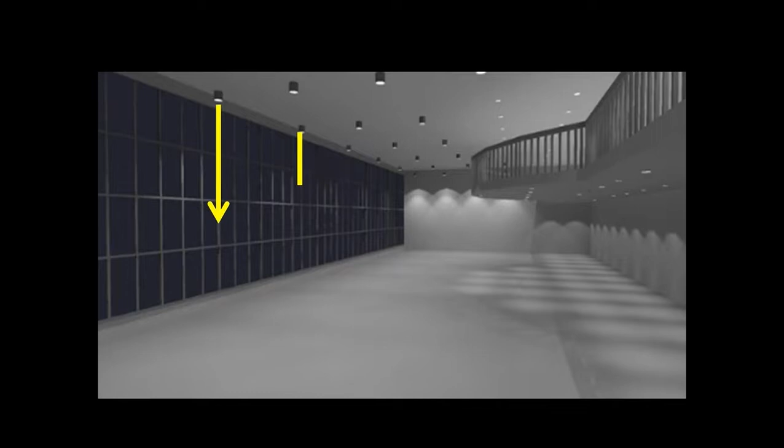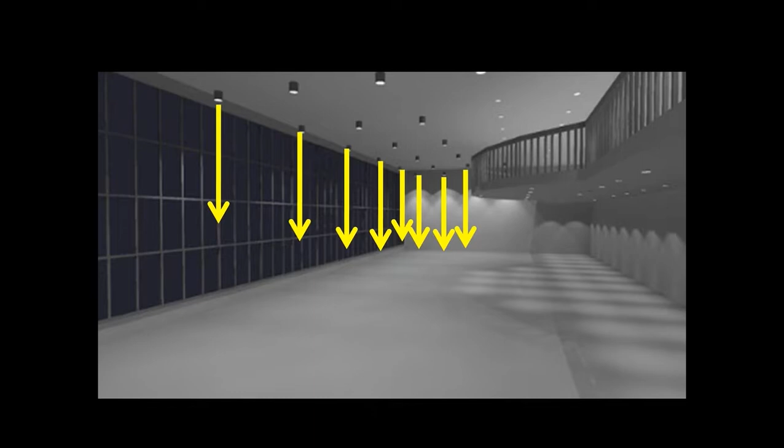Talking about the lighting design industry, and especially my profession as lighting designer, there is sometimes a misunderstanding about what is or what does lighting design mean. Sometimes we think lighting design is just choosing a luminaire in a catalog, finding a beautiful shape, finding something with a beautiful finishing, build a 3D model, put all the luminaires in a row, or build a scheme of the luminaires, and then calculate how much lighting we can obtain on the floor or on the surface. Sometimes our softwares offer a visualization in false color that is particularly useful, but it's not enough.

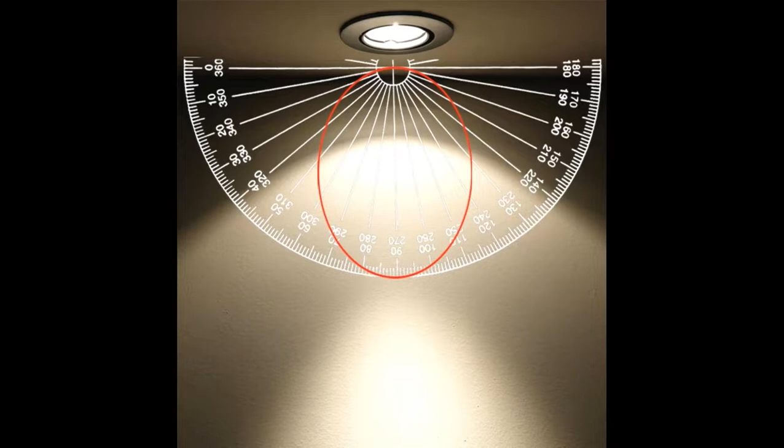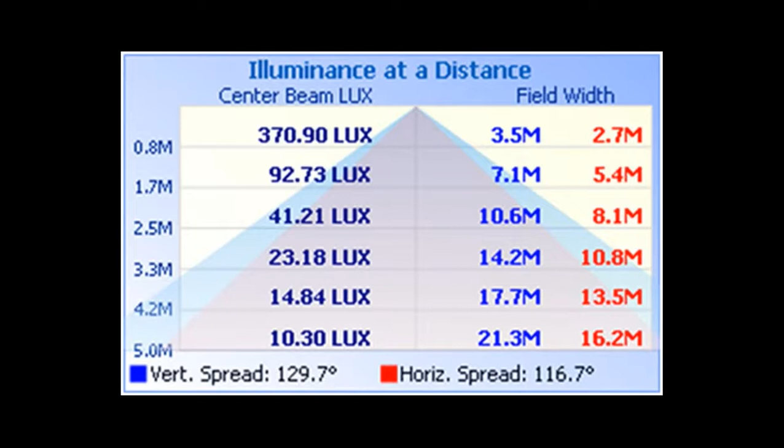The information we are able to find in the web catalogs or in a website sometimes is limited only to just the photometrics. So when we choose a luminaire, we have the possibility to understand what kind of beam opening we have and possibly some other details about the luminous intensity. And this allows us also to make some simple and rough calculation about how much light we can obtain on the task surface, just understanding and evaluating the distance from the luminaire to the surface.

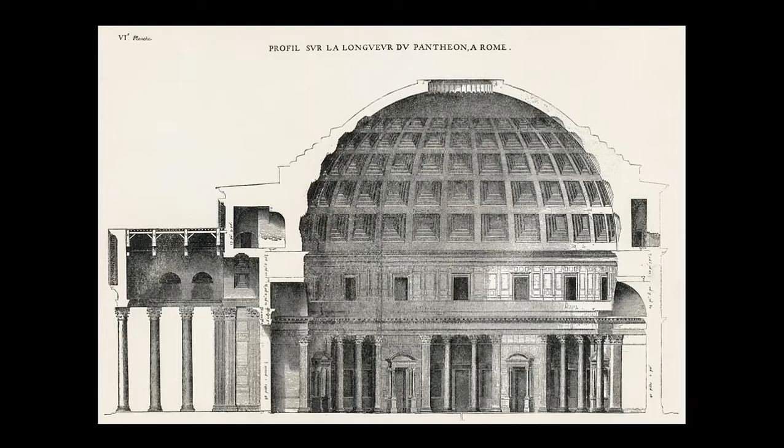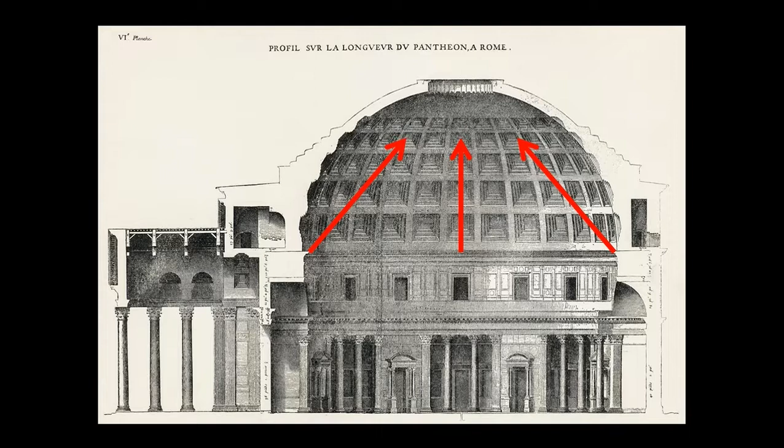It's very simple. But if this is very simple when we work in a new architectural project or in something that is built from new, what about if we have to work in another situation? Let's make an example. Let's suppose we are hired to design the lighting for the interior dome of the Pantheon in Rome. We can build a concept, we can find the positions for some particular luminaires, and we can have an idea about the luminaires.

If we choose a luminaire in a catalog, we can obtain some data that are absolutely interesting for understanding the power consumption, the luminous efficiency, of course the optics, the adjustability, the dimension, also the weight. And then we have some data that are, let me say, not so much meaningful for us. For example, the color temperature and the CRI, but the numbers themselves are not meaningful for us as lighting designers. And also the photometric file that we are able to download from the manufacturer website is not enough any longer, because we have just a quantity of light. We have just the information about quantities, not

quality. For a project like the Pantheon, first of all, we have to consider that it's very difficult to build a 3D model that can simulate also the materials and the ancient surfaces that are part of the building, also the colors, also the finishing of the colors are very difficult to simulate in a 3D model. And so also the calculations are very difficult and cannot be precise. So, what do lighting designers need from their side?

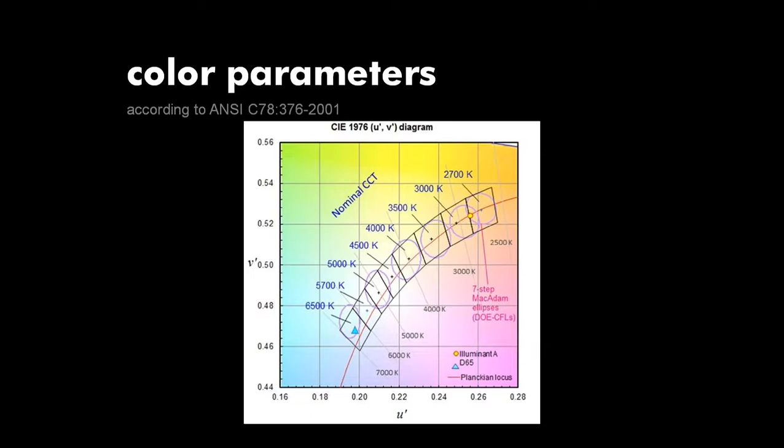Then, most of the manufacturers state in their catalog their luminaires are just 2 or 3 step MacAdam ellipses, and the ellipses are sometimes very rough. This is not useful for us. I want to see a diagram with the nominal color temperature, correlated color temperature. I want to see exactly where the MacAdam ellipses are found, and especially in the part of the black body.

I want also to know the radiant flux emitted per wavelength, because in some particular projects, for example, wineries or food shops or art galleries, etc., some wavelengths can be very dangerous or can create damages on pigments, flavors, and other peculiarities that are typical for these products. To my knowledge, there are no manufacturers at this time that are sharing this kind of information.

But let's think we are choosing an RGB product. So, what is the emission for single channel? I want to see exactly the emission, because if I try to create a colored light, I want to see how I can mix the RGB emission and create that particular color. That sometimes is very difficult.

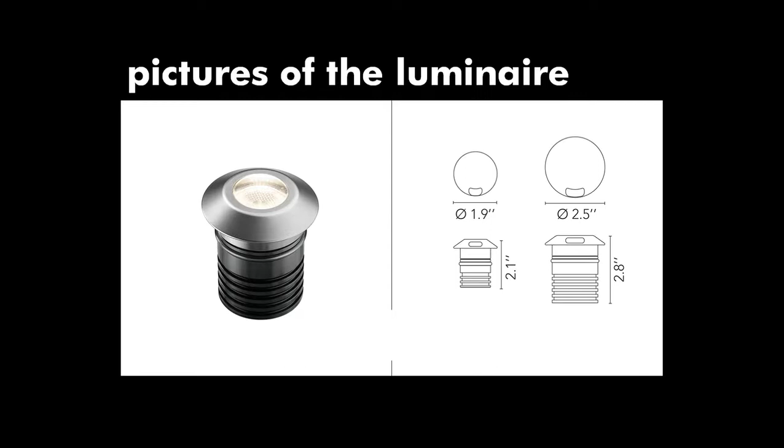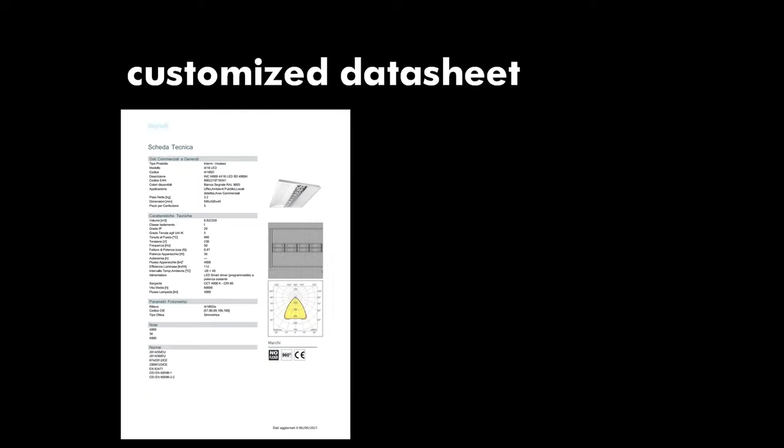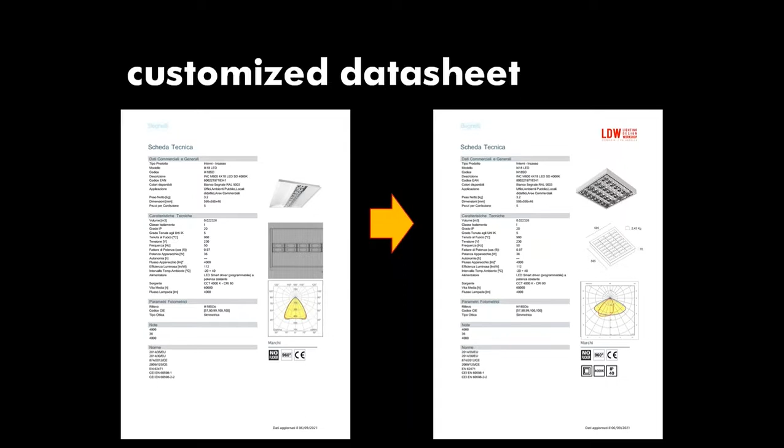And of course, I want to obtain the significant pictures of the luminaire, not just the finishing, but also the dimension, to understand if it's possible to put the luminaire in the position I considered. And I want to customize my data sheet in a way that is not just automatic because it was created by the manufacturer. And this does not mean that I have to put my own logo on this paper. I want also to build my data sheet in a way I can choose exactly which information I would like to share with the contractor, with the installer, with the architect, etc.

So I have 3 questions for the manufacturers. May I find all the data I need included in a unique file, so I don't have to waste time looking for the data I need in different sources? A unique file doesn't mean the photometric data, so an IES or Eulumdat file is not enough.

Another problem: may I automatically verify if the data I need are updated, so I don't have to waste time calling the manufacturer, the sales agency, the representative, and ask if the data I found in a catalog that was printed 6, 8, 12 months ago are the same data that are currently offered to the market by the manufacturer?

And the last question, I would like to save my data in my open and customizable database, because I don't want to be forced to use a particular software or another kind of solution that is not useful for me. I want to create my own database and I want to store all the data I need in my database so I can use it when I want.

So my last wish is I would like to automate the process and avoid looking for data among several info sources like, for example, catalogs, websites, email sending, or phone calls. This is my wish, and I hope also my colleague lighting designers will agree with me.

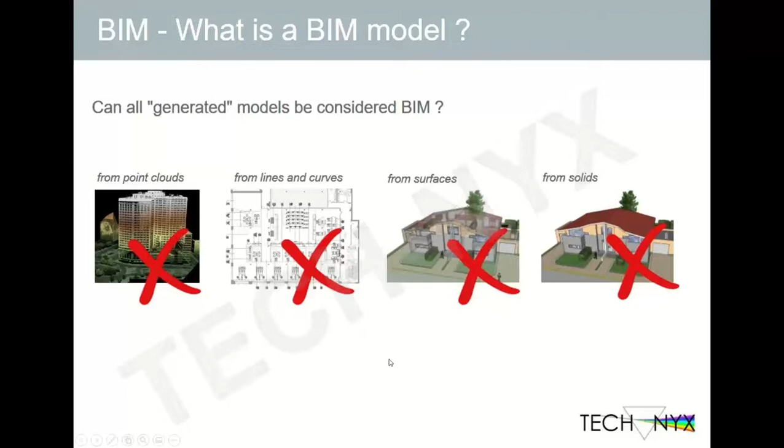So, can all generated models be considered as BIM ones? We can say that point clouds are not considerable as BIM files. Lines and curves, the same. Surfaces, the same. Solids, the same. These are not part of the BIM concept, but mostly they're part of the old CAD process, the CAD approach.

So the BIM model is a smart information container and should include all information regarding the construction and its parts. The BIM project describes the built environment, so we can include the 3D model, the coded and discipline-specific information, and the relationships, hierarchies and constraints between components. Yes, because one of the key points about designing is that if the electrical engineer works on a project, he has to know if it is possible to let the cable pass through a wall. And so you have to define the constraints among the different components.

The BIM project contains the geographical location, the description of the geometry, the material properties, the component properties, the system properties, the properties of the technical elements, the stages of implementation. So step by step, from the basic idea, you define the first approach to the design, and then you define more and more the project and the different elements and components up to the final stage.

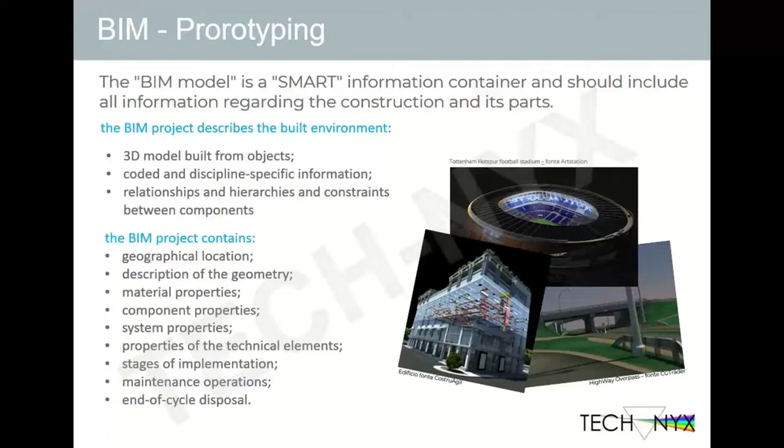And end-of-life cycle disposal. Yes, this is another key point because we know that a building, as any product, has a life. And at the end, having the full details of the components, it is possible to define how to get them back and reuse the different components for new products. And this is possible through the BIM world.

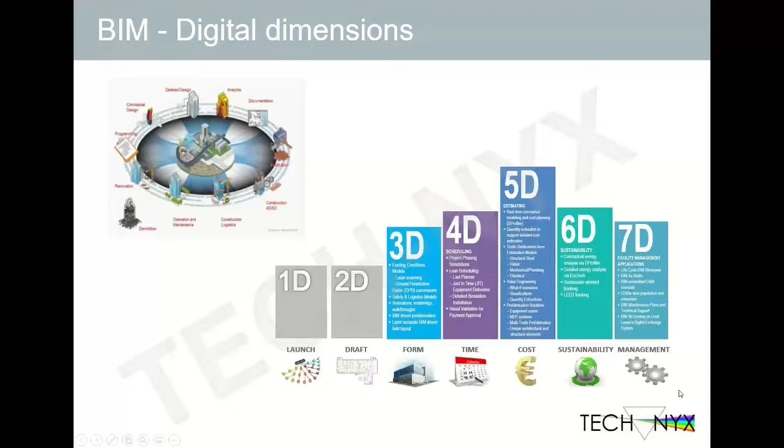So this is the drawing describing exactly what BIM is. We launch the project, we define the draft, the form, the time, the cost, sustainability and the management. These are different steps involved in the BIM process. So it is no more like it was done in the past through CAD programs. CAD is probably one little part of the whole process, but it is something much more than before, and all managed in an interoperable way.

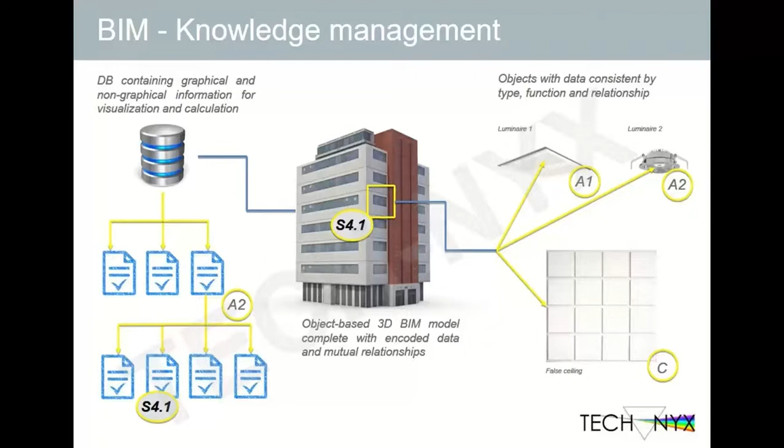So knowledge management, what does it mean? It means that if we define a building through the BIM process, we can have a structure and all the information packed in a database. And from there, we can get back all the information in order to have the details about the products at any stage, at the beginning during the design process, but also when maintenance is needed or when you have to get back the materials at the end of life of the building.

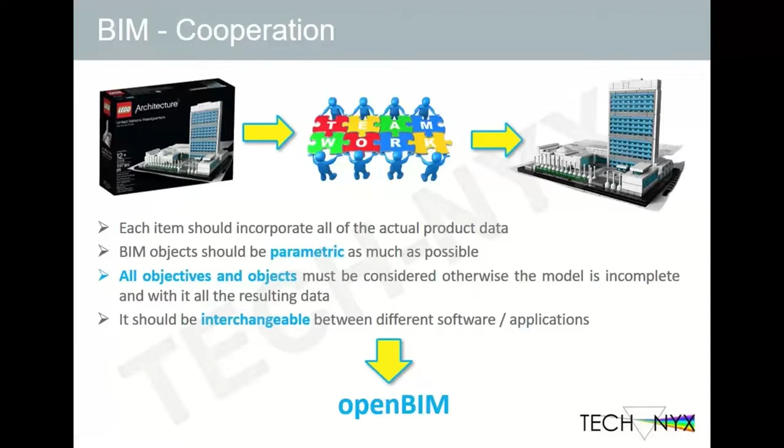So, from the old world, in order to synthesize what was previously, we had a work where the different people managing the design process were interacting independently from the others. So it was only 1-to-1. It was not like in the BIM, where we work on a common file that is shared by the different people that can act on the file at the same time.

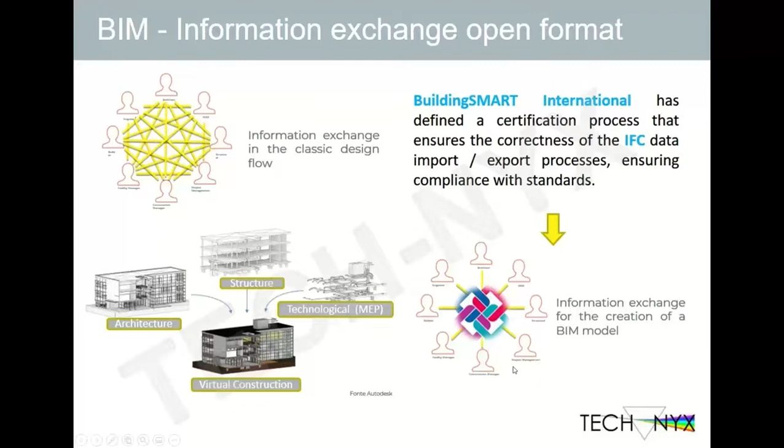In this case, we have the electrical engineers. The electrical engineers used to talk to the civil engineers, who then have to talk to the other engineers or to the installer, etc. It was more messy in this way than what can be done through the BIM approach. BuildingSMART is helping, as we already said, in defining the standards in order to share the information in a more and more efficient way than before.

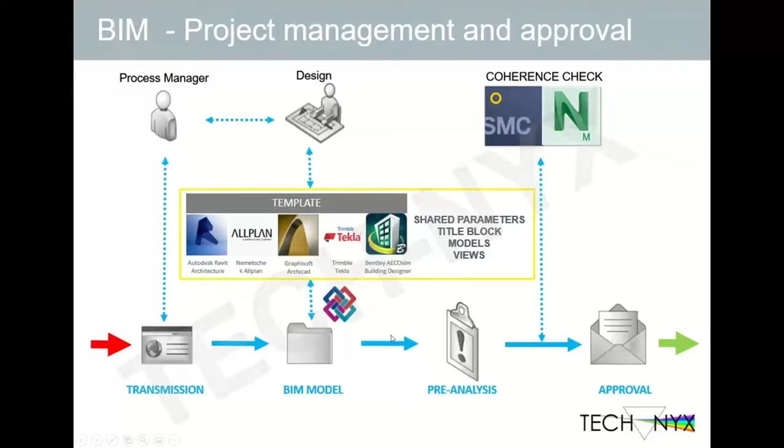So you can understand from what we said up to now that the BIM is really helping us in different ways to integrate the different operations and different managements that up to now were kept and managed separately. We can have them managed all together through a single project file.

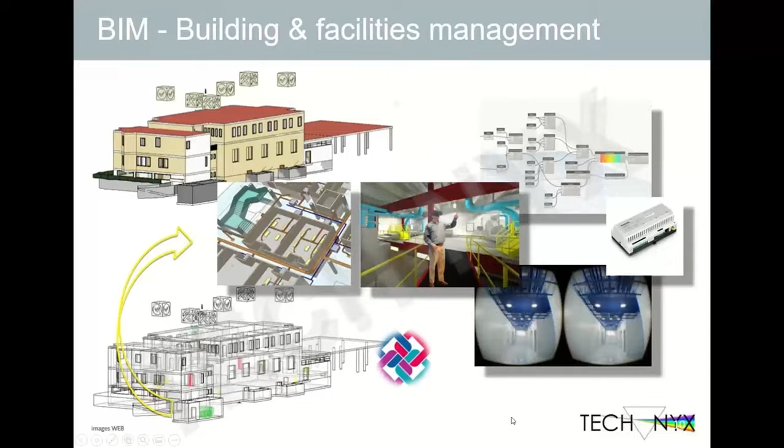So about the standardization, the ISO published ISO 19650 in 2019, and it is describing the BIM world. It is based on 3 parts. The first part is about concepts and principles. The second one is the delivery phase of real estate. And the third one is the management phase of real estate assets. Another standard is defining the IFC open schema. And there are other standards about different issues like delivery manuals, the IDM, and the IFD about classification.

From this main standard is coming another standard, that is ISO 16739, for the definition of the Industry Foundation Classes, the IFC that we see here. And from here was driven the definition of some standards, for example, here in Italy. So it means that there is a huge process going on about the definition of the BIM world all over the world. You can see here Italy, UK, Germany, France.

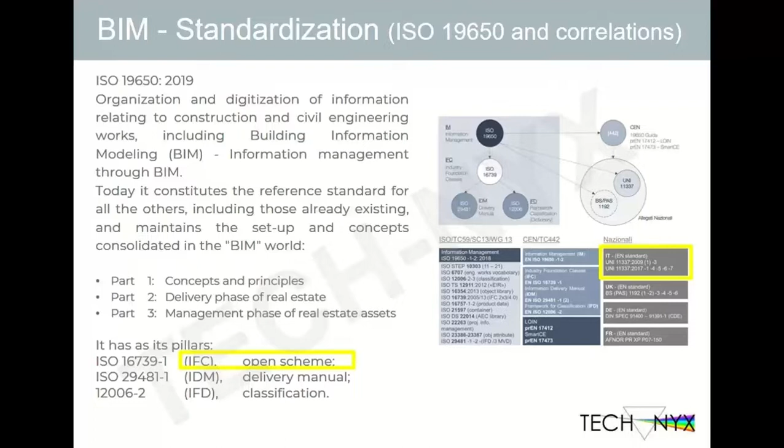What is it carrying on? It is carrying on more or less a problem about interoperability, because you can understand that if we have different standards in different parts of the world, then it could be more difficult to manage the products and information about the products in the same way. So the checking of the products is more complex than having a single standard in common for everybody. But at the end, we can see that the process is ongoing.

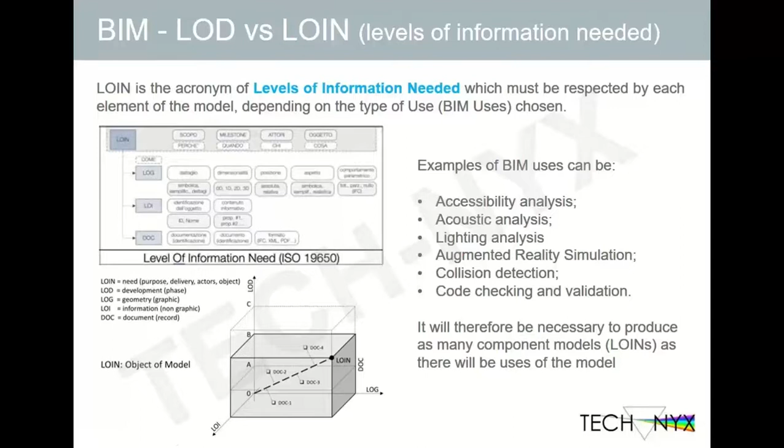So for example, if you need to define the constraints in your project, then you cannot wait up to the end, because otherwise the others cannot go on with their work. So you may need at that time to use the real 3D of your product in order to check all the constraints. And probably you are in the middle of the project development phase. So this new concept, the LOIN, is really helping in order to have a more flexible way to approach the process, the project.

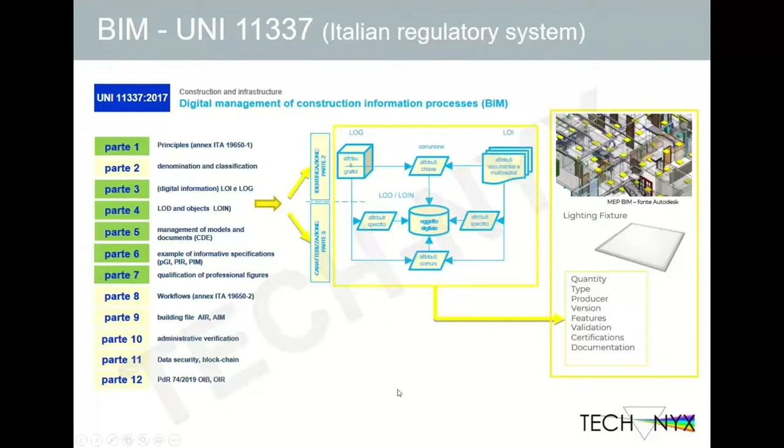And this is what the Italian regulatory system is defining. So the different parts of this standard, that is digital management of construction information process, BIM, and all the parts characterizing this standard, always in line with the BIM concept.

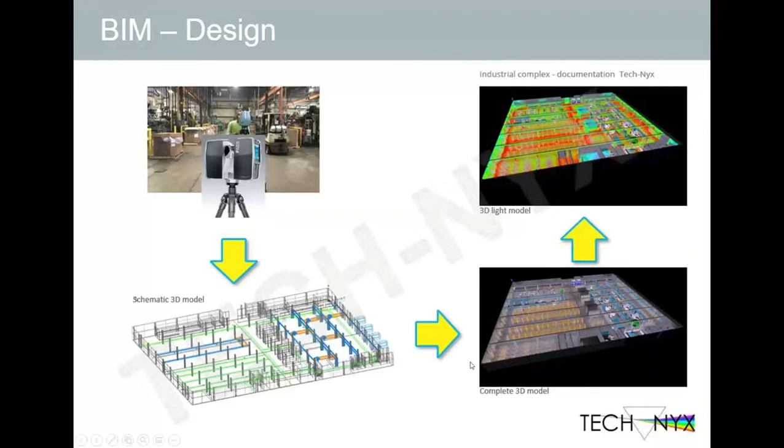So in here, we have some examples about the process. It was studied through this machine, through this system, and realized the 3D of this object. Then the products were adapted to this design in order to come at the end to the final lighting. And this was managed obviously through the BIM.

And at the end, we had the chance to have all the list of materials, all the power consumption, all the maintenance needs perfectly defined through a single project file. So there are different programs managed, and these programs were also managed for the construction of the new stadium of Atalanta over here in

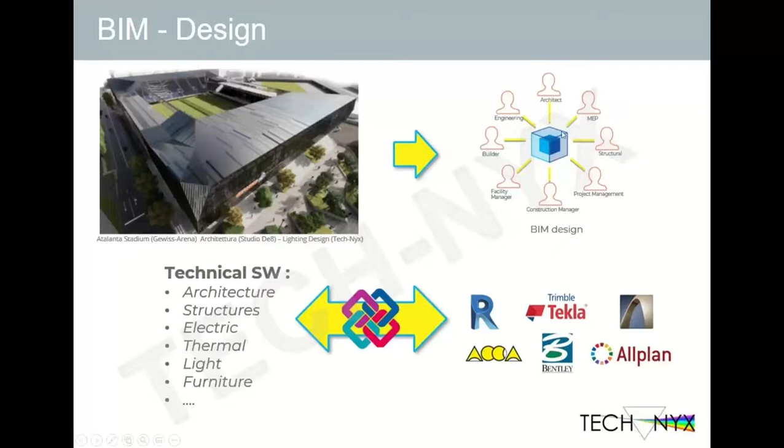Italy. And the BIM process was used with great satisfaction for everybody, because the BIM process involved the engineering, the architect for the designing of the cover of the tribunes, the MEP, the structural, the project management, the construction manager, the facility manager, and the builder, all together working on the same project. And these are some examples about this stadium.

And the BIM was very useful because, for example, it had to define the constraints. Because when the 3D of the stadium and the new cover was defined, it was clear that having to install the luminaires over here, it was absolutely needed to define if they could be placed exactly where the design defined. So without the BIM, it was not possible to see that it was not possible to install the luminaire over here, and it had to be moved.

And it was done through the project phase, and not once the installation was on the way to be done, finding at the end that it was not possible to place the luminaire exactly here. So really, the BIM approach allowed us to go there and install the luminaires exactly where they could be installed.

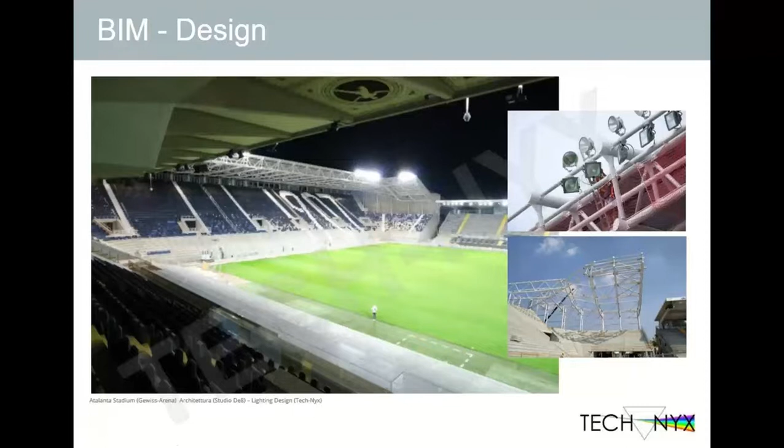A few words about the programs. So there may be different approaches. It is clear that it is not possible to have a program, let's say a BIM editor, working on a project, and this BIM editor having all the features about, for example, the lighting calculations, the calculations on the structures, on the different platforms, resistances, whatsoever. So it is clear that more and more we have to define a world where different programs cooperate together in order to transfer the information.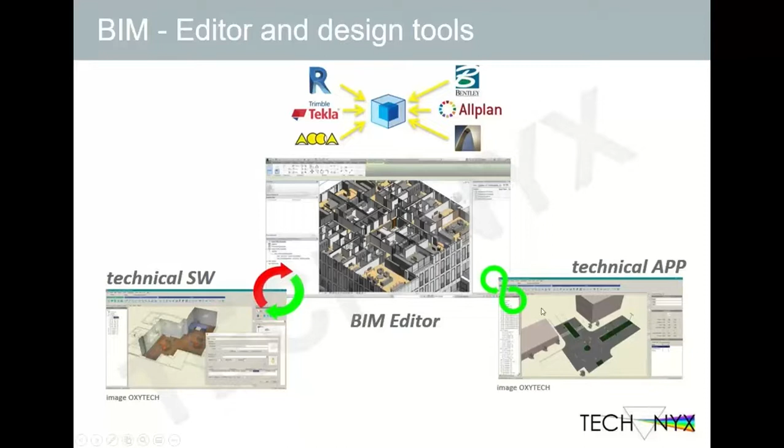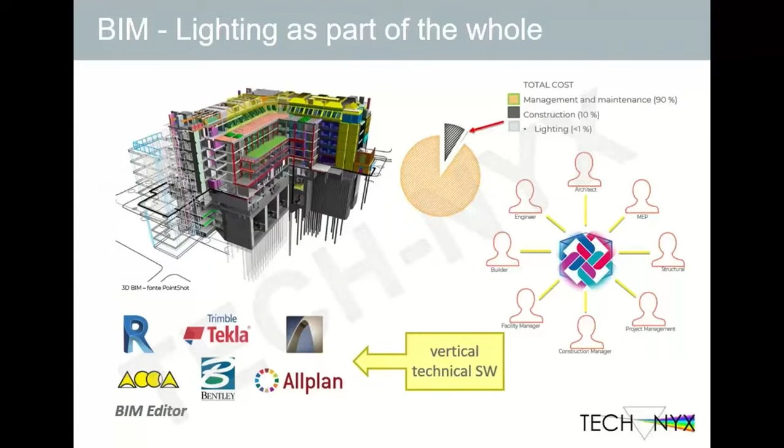It is not advisable to develop other files, because other files take time, for example, for the manufacturers, because they have to create other files. Let's focus on a single file that the designers in the market can easily use at the same level. So let's say that we can have an IFC file for ceramics, and when I have to define the floor of my room, I have an IFC file, so that when I have to define the lighting, I have an IFC file for the lighting, and the process will be managed always in the same way. Let's not think about something different.

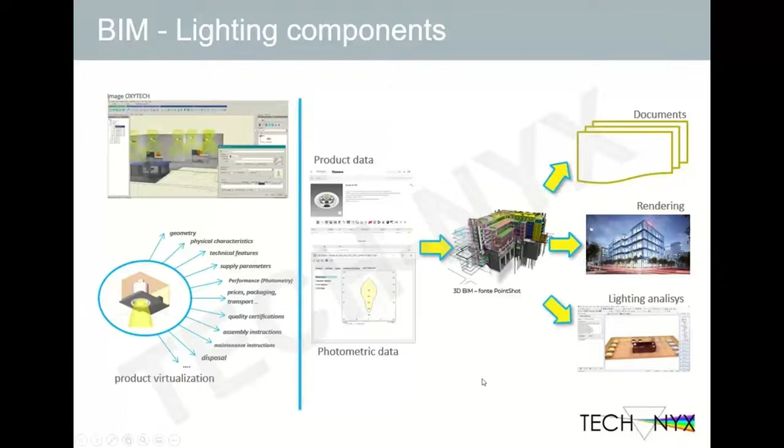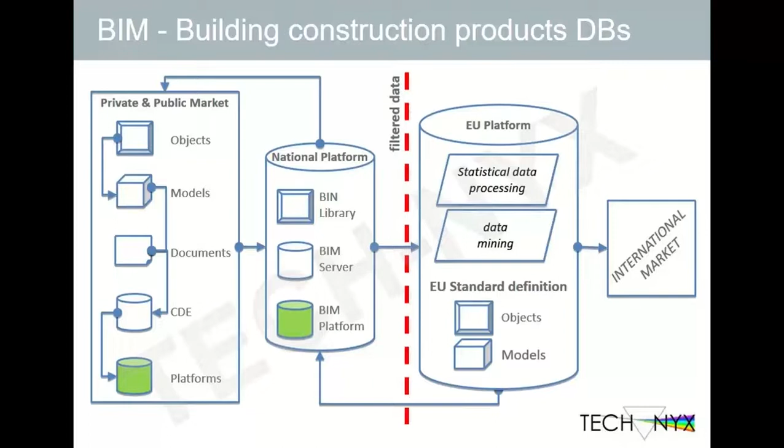So this is summarizing exactly what we did. It is absolutely possible to use an IFC file and then manage databases, if you structure your database in order to let the information be imported into it. If we have different files, then we have to develop different applications in order to manage them. And we have to say that, for example, here in Europe, a big product database for everybody is in the process of definition. And if we do not define, as we said before, a common standard, it will be difficult to supply the information to this database. We have to focus on a single file.

And this is to summarize the concept that we have to consider the standards, the more advanced standards, and consider that the old LDT and IES files cannot be used anymore in future. We have to pass through more powerful files like the IFC file and the UNI file.